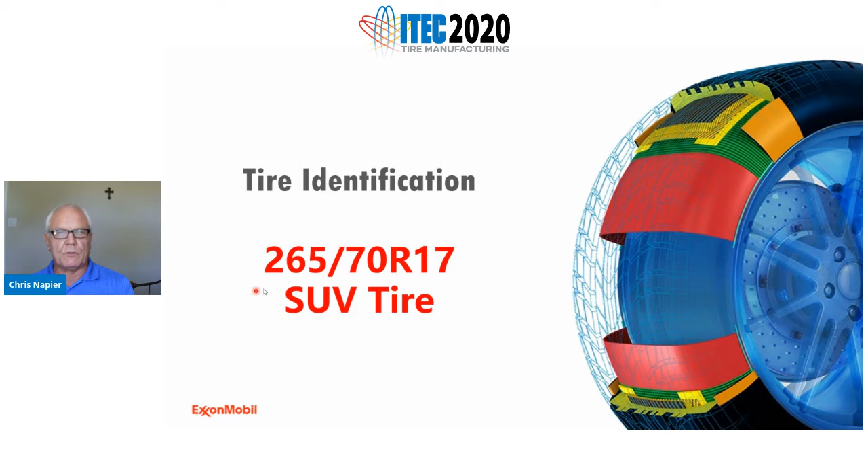So tire identification: the size of tire for this survey was a 265/70R17 SUV tire. The reason for looking at SUV tires is we look at 2015 through 2020, you can see the growing segment of the SUV market as it increased over sedans, not only in the United States but also globally around the world, and increased demand in all regions and global market share for the SUVs.

So the 265/70R17 OE tire fitments, and also that would relate to the replacement tires as well. It was the number one, number two, or number three OE or replacement tire size 2014 through 2019 for all SUV type vehicles and light pickup trucks.

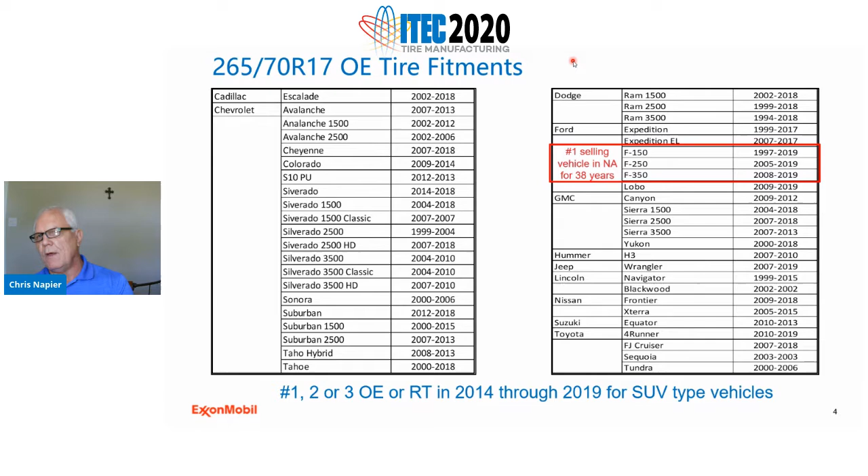And you can see here, these are just a part of the OE fitments for this particular tire size, which also includes the number one selling vehicle in North America for 38 years in a row, which is your F-Series pickup trucks by Ford. And that would also include the Lobo here, which isn't highlighted.

So the summary of tire identification for the SUV tire survey: 22 tire sets purchased in the United States. All these tires were purchased in the U.S. Tire costs range from $97 to $220 with an average cost of $150. And as I already stated, the 265/70R17 is the top OE tire or replacement tire for SUV type vehicles 2014 through 2019, and probably also for 2020, though we don't have that data yet.

Tires all purchased in the U.S. were manufactured in 9 different countries: 6 were manufactured in the U.S., 4 in Thailand, 3 in China, 2 in Mexico, 2 in South Korea, 2 in Indonesia, and 1 tire each from Chile, Russia, and Vietnam. One note of importance is that although there were Japanese tire manufacturers within the survey, none of the tires were actually manufactured in Japan.

All tires were UTQG approved as required by U.S. law. We bought 5 tires per set of the 22 different manufacturers, with the same production date within each tire set. We used tire costs correlated to region, manufacturer, and company rank, which we'll look at next. All tires had 2 polyester cords, 2 steel belts, and a nylon cap ply.

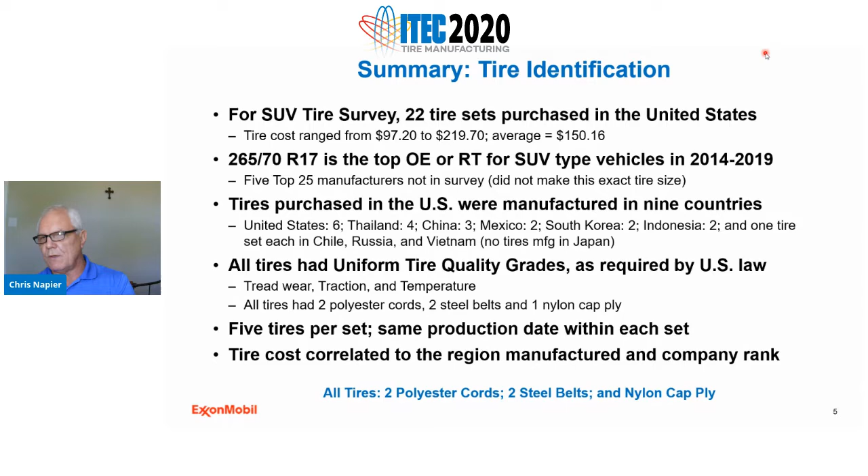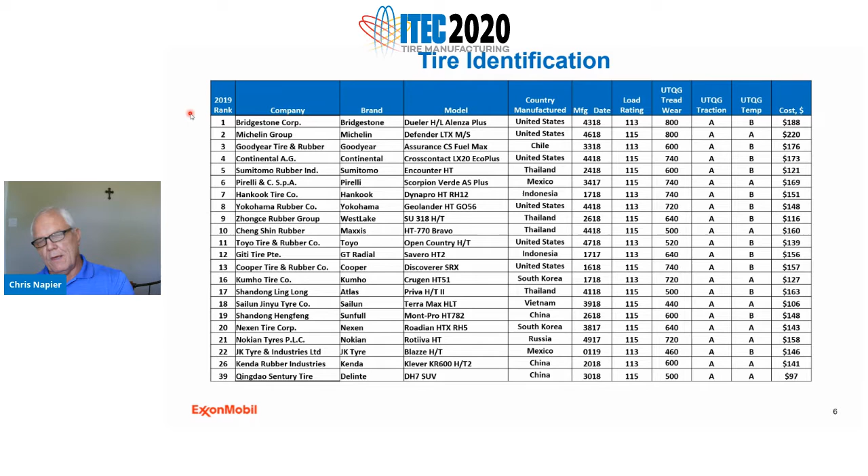So these are the 22 different tire sets. This is the 2019 published rankings, as the 2020s aren't out yet, or they will be maybe by the time this presentation is made. You can see by company rank, number 1 Bridgestone, down in this case to number 39, Sentury Tire. There were 5 missing tire companies in here: number 14 Apollo, 15 MRF, number 23 Shandong Haohua, 24 Titan, and number 25 Triangle. The missing companies were omitted because they didn't make this particular tire size, or if they did, it was not a tire size that was available within the United States.

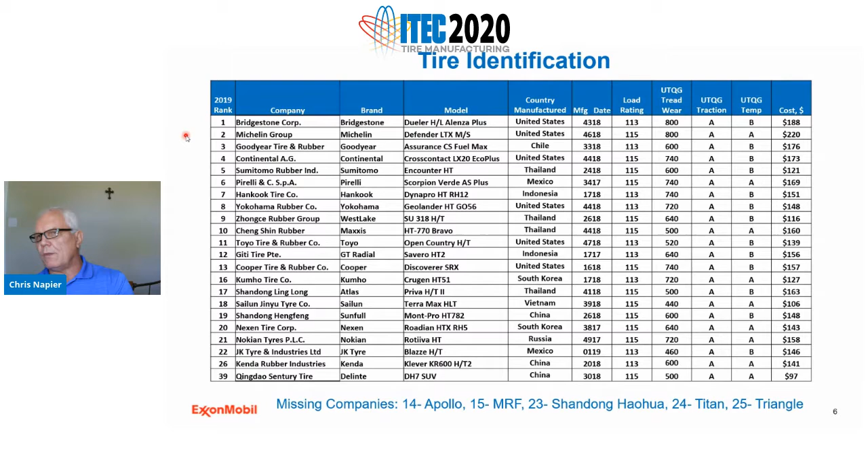So you can see here we have the company, the brand, the model of tire, the location of manufacture, the manufacturing date, UTQG, and also on the extreme right-hand column, you can see the cost per tire.

So in order to make sense of this, we divided the companies into tier groups. Tier group 1 is a well-recognized way of looking at the different companies, and has been utilized by different presentations and publications. The number 1 tier, which makes 45% of the tires in the world, are the first 4 tire companies. Tier group 2 is the next 7 tire companies, making approximately 20% of the tires globally. So that's our first 11 tires. The next 11 tire sets are what we call tier group 3, anything above the 11th tire company, accounting for about 35% of the tires manufactured globally. At the bottom, you see the tire companies that are missing because we could not obtain that particular tire size within the US.

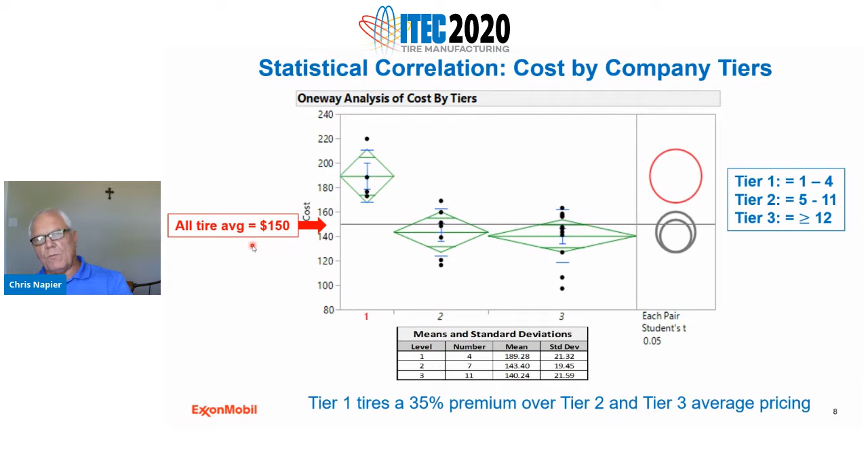As a reminder, tier 1 is companies 1 through 4, tier 2 is 5 through 11, and tier 3 is those graded 12 and greater. Tier 1 tires are 35% premium over your tier 2 and tier 3 average pricing. So there's not a lot of difference between your tier 2 and tier 3 group, but quite a premium for your tier 1 tires. The overall average for all tires is $150.

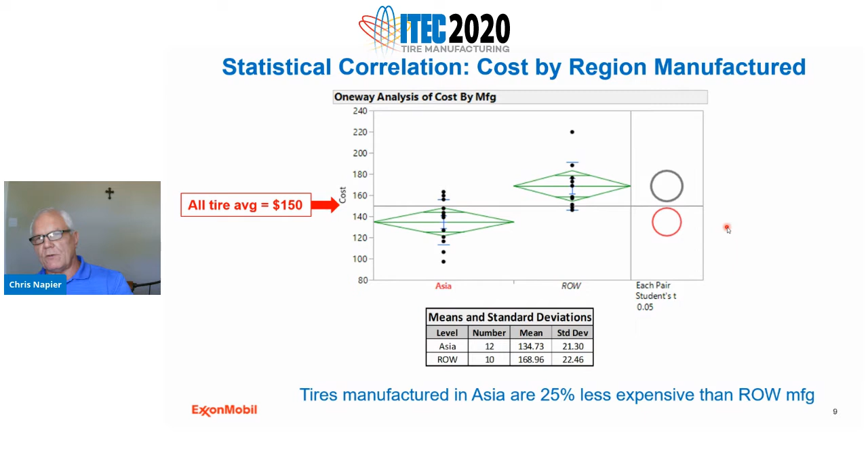Now we look at statistical correlation of cost by region manufactured. We had 12 tires manufactured in Asia, and 10 tires manufactured in the rest of the world. Tires manufactured in Asia are 25% less expensive than those manufactured in the rest of the world. Once again, the average for all tires is $150. So there's quite a statistical difference between tires manufactured in Asia and the rest of the world.

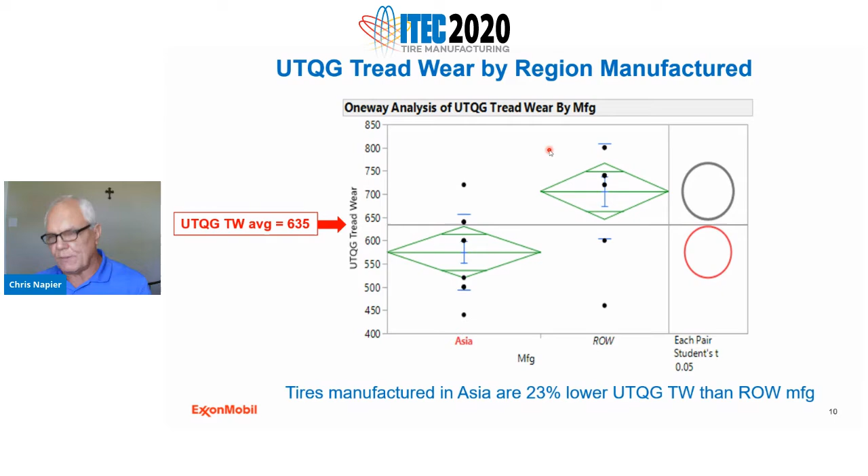So, UTQG tread wear by region manufactured: the average UTQG for all tires within the 22 tire group is 635, but tires manufactured in Asia are 23% lower UTQG than those manufactured in the rest of the world. Now, even though we looked at almost every type of correlation within this, just because we don't show it doesn't mean necessarily that it wasn't evaluated.

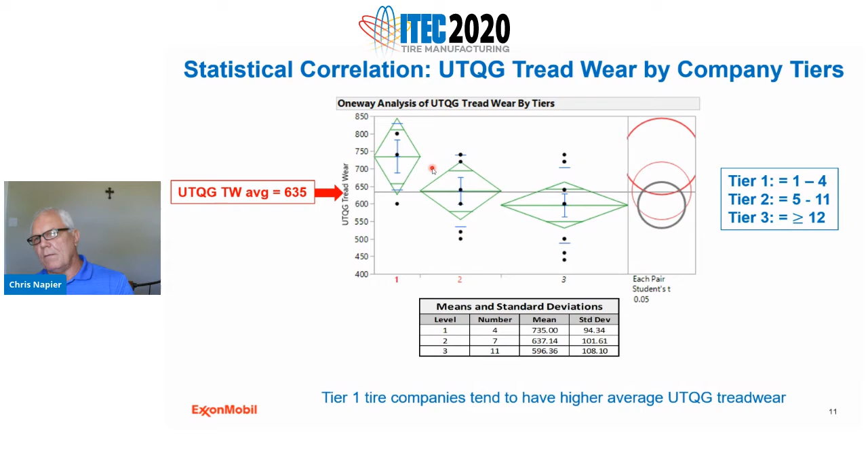So, UTQG tread wear by company tiers. The average UTQG was 635 for all tires within the group. Here you see tier 1, tier 2, and tier 3. Although it wasn't really statistically significant, you can see there's an obvious trend: tier 1 tire companies tend to have a much higher average UTQG tread wear than tier 2 and tier 3 companies, but there's a trend within all groups.

Next, let's look at tire inner liner properties. This is an example of an isotherm TGA curve that we use to do a TGA analysis for inner liner composition analysis for all tires within the survey.

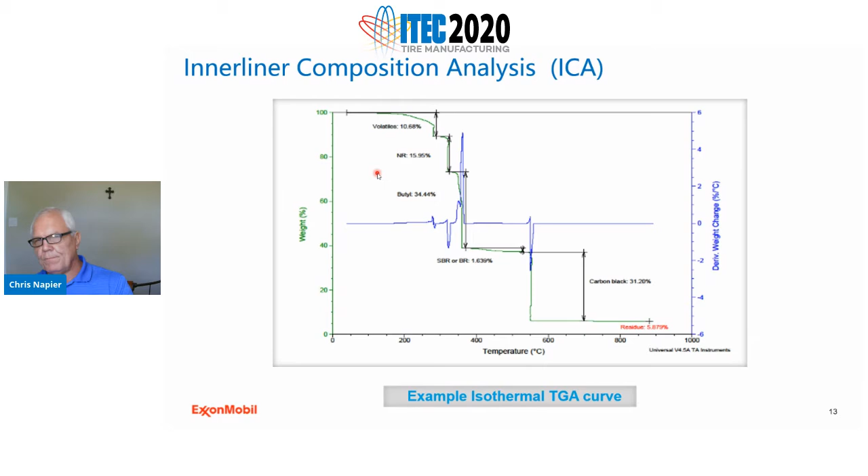In addition to doing a TGA of the composition material of the inner liner, we also did inner liner gauge analysis. This goes from toe to toe all the way around the inside of the tire. We also look at not only the inner liner gauge, but also the cushion gauge, and we establish an average gauge for both.

It's measured every 2 centimeters from the toe all the way up to the shoulder, once at the center, from the second shoulder all the way down to the toe again, giving us 25 different measurements. We record the maximum and minimum.

We determine penetration flow of the inner liner between the carcass cords and do a profile analysis. The inner liner gauge significantly impacts the inflation pressure loss rate of the tire, which we'll talk about in more detail.

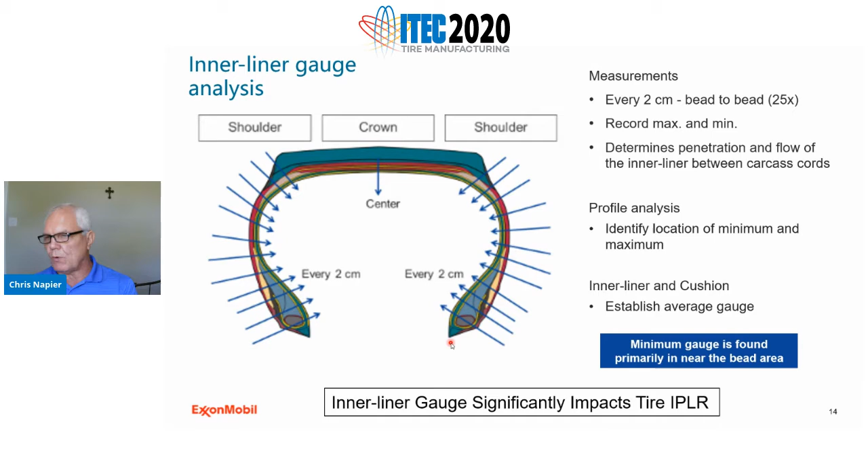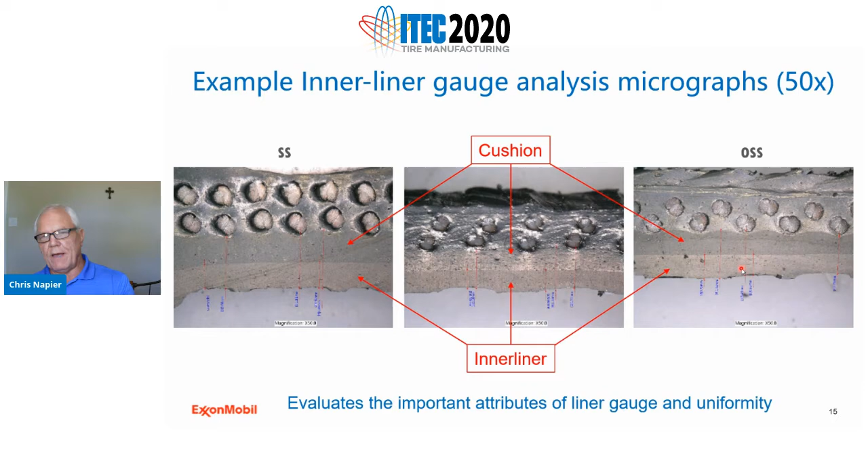Here's an example of inner liner gauge analysis micrographs, 50 magnification. This is the inner liner you can see here, and then also, in addition to the inner liner, you can see the cushion layer. This evaluates the important attributes of tire inner liner gauge and uniformity.

So the summary of our tire inner liner properties: all 22 SUV tires contain halobutyl in various amounts in the inner liner, with an average halobutyl content of 85 pHr. 5 of the tires had 100 pHr inner liner content, 3 of the tires were 90, and so on. You can see we had one tire with 62 pHr.

Natural rubber is always a secondary polymer in all the inner liner formulations. All 22 tires contained carbon black, with an average carbon black content of 66 pHr. 6 of the tires contained calcium carbonate, calculated from TGA ash at 790C. Inner liner gauge varied from 0.48 to 1.14 millimeters, with the average for all tires of 0.8 millimeter.

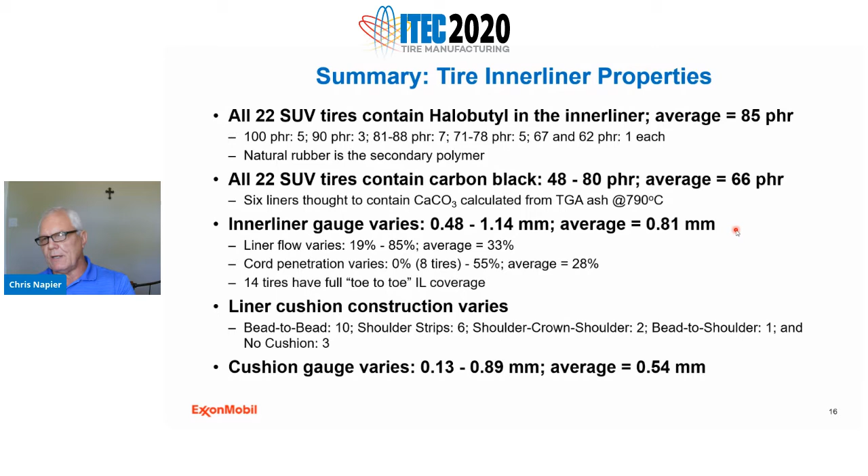14 tires had full toe-to-toe inner liner coverage, meaning 8 tires did not have full coverage all the way from toe to toe. Liner cushion construction varies very significantly: we had 10 with bead to bead, 6 with shoulder strips (shoulder crown to shoulder, bead to shoulder), and no cushion at all in 3 of the tires. The cushion gauge varied from 0.13 to 0.89 in those tires that did have a cushion, with an average gauge of 0.54.

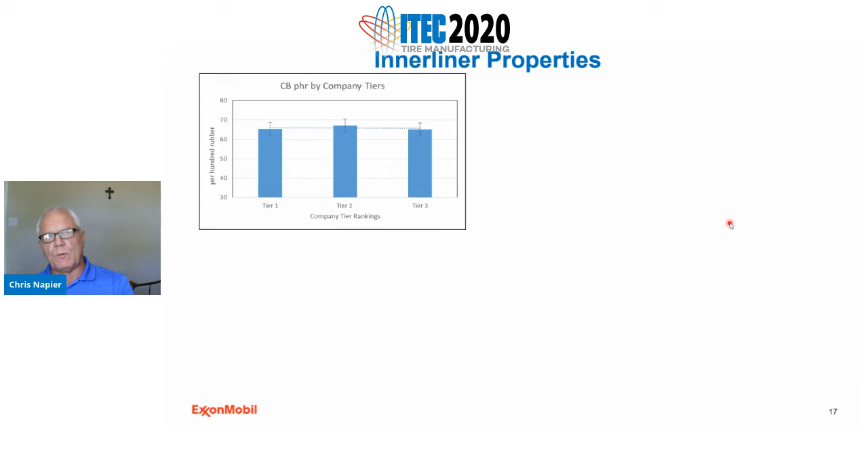So looking at inner liner properties by company tier: carbon black content showed no significant difference between tier 1, tier 2, or tier 3 companies. Inner liner gauge by company tier also wasn't very different - not a lot of difference between tier 1, 2, or 3 tire companies.

Where we did see a big difference was in halobutyl content by company tiers. Tier 1 tire companies, those 4 companies, had much higher halobutyl content than did our tier 2 and tier 3 tire companies.

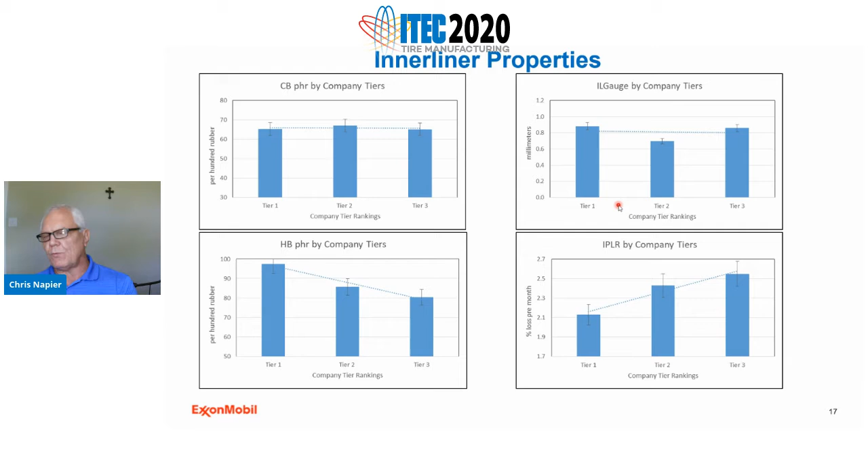And IPLR by company tiers - we'll look at inflation pressure loss rate in much more detail in the next section, but you can see that halobutyl content is directly related to the inflation pressure loss rate. Tier 1 companies had a much higher halobutyl content, which was directly related to their inflation pressure loss rate - how well the tire holds air over time.

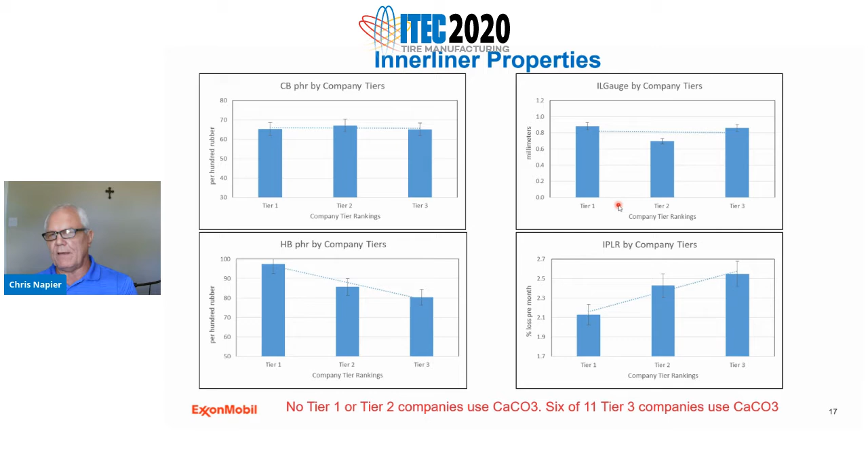No tier 1 or tier 2 tire companies used calcium carbonate. 6 of the 11 tier 3 companies did use calcium carbonate.

So we look at an analysis of variance, the inflation pressure loss rate model. What were the big factors? Halobutyl content - your halobutyl phr was the number one factor affecting your inflation pressure loss rate of tires. The next was inner liner gauge, which was of secondary importance when it came to how well the tire holds air over time.

Halobutyl rubber and inner liner gauge are statistically significant when it comes to inflation pressure loss rates.

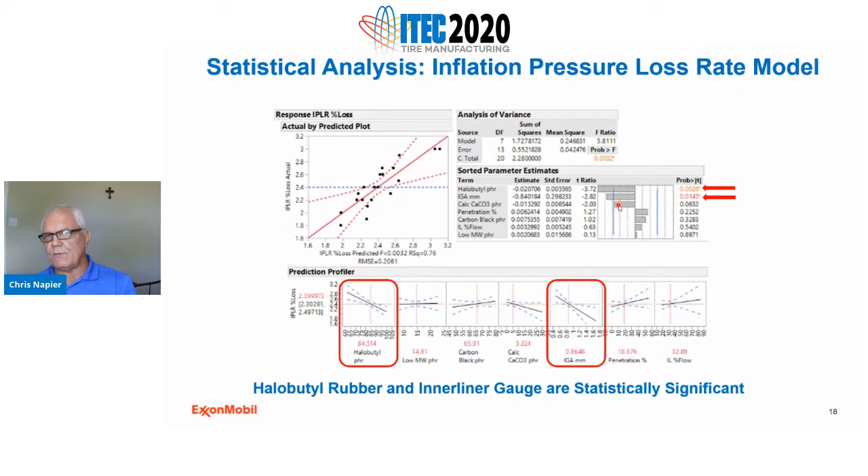In the next part, we want to look at tire weight. The weight of the 22 tires varied pretty significantly, from a low of 15.7 kilogram to 20.8 kg, with an average of 17.8. 5 tires were less than 17 kg and 2 tires were greater than 19.8.

There was no correlation to region manufactured or rest of the world when it came to tire weight. Statistical analysis shows tire weight qualitatively correlated to tread depth, and there was no correlation to presence or type of inner liner cushion. No other tire properties were measured. So the important thing was that there's statistical analysis showing weight qualitatively correlated to tread depth.

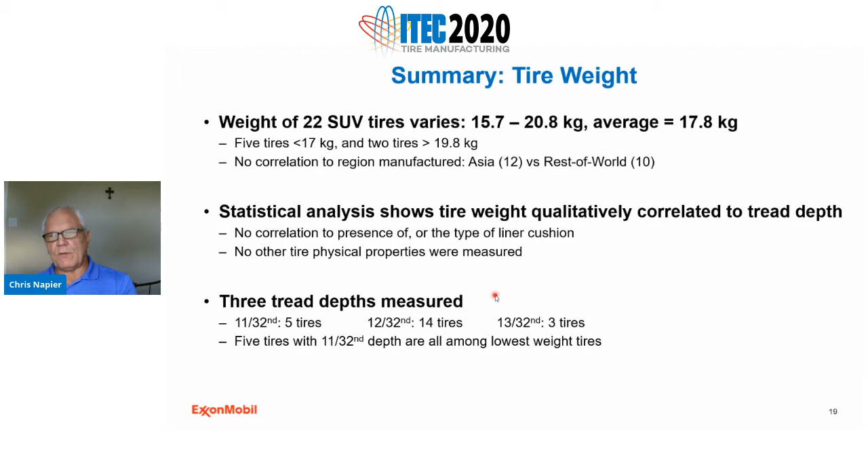Three tread depths were measured. We found 11 32nds in 5 tires, 12 32nds in 14, and 13 32nds in 3 of the tires. And 5 of the tires with the 11 32nds tread depth among the lowest weight tires, and we'll look at that. So here's tire weight, and you can see here that the heaviest tire was 20.77 kg, and the lightest tire in the group was 15.7 with an average of 17.81. Over here on the right-hand column is our tread depths in 32nds.

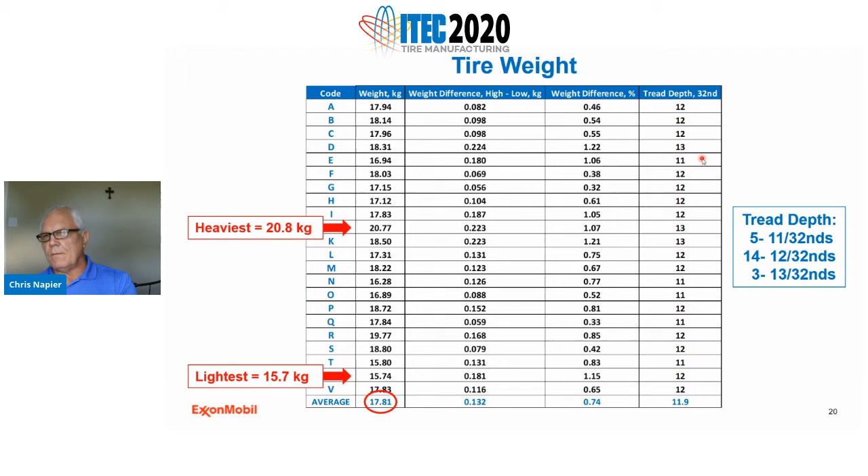Statistical analysis of weight by region manufactured. The average weight, as you see here again, is 17.8 kg. And we look at it by region manufactured, and there's just no statistical correlation, but there's a wide range. Although there is no statistical correlation between Asia or the rest of the world, there is quite a wide spread of weight differences between those tires manufactured in Asia.

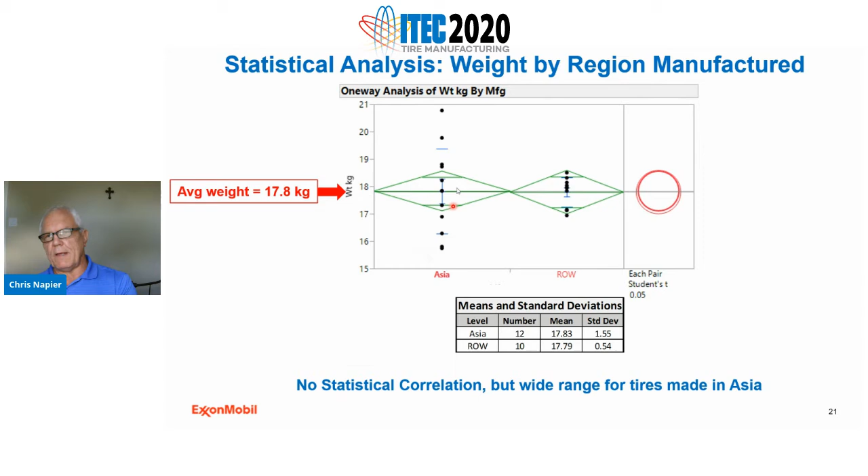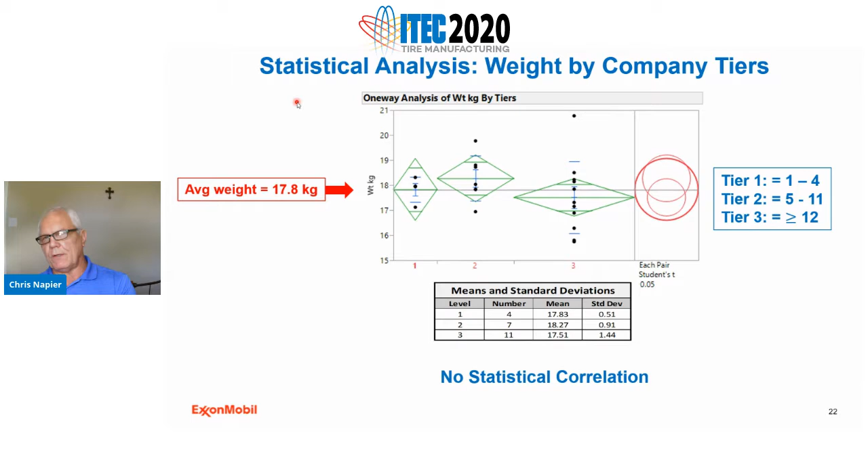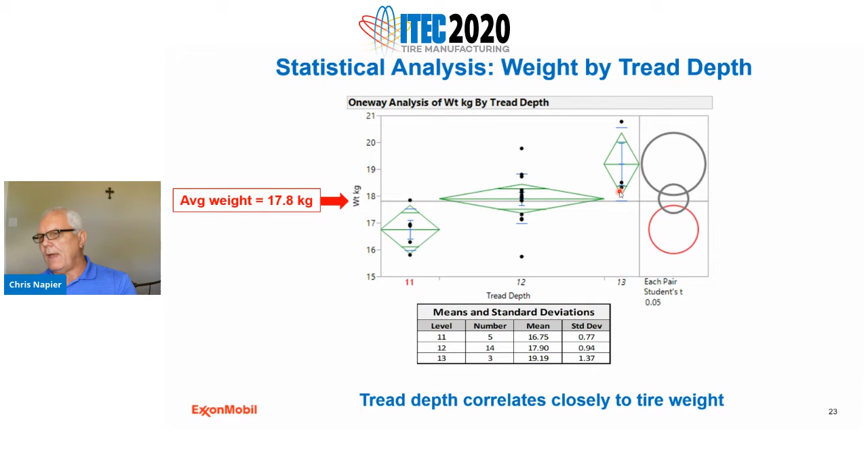So again, look at statistical analysis of weight by company tiers. Once again, no real statistical correlation, whether it be tier group 1, 2, or 3. So where is the difference in weight? Where can we find a connection between weight and any of the other properties? That was in tread depth. So you can see that although the average weight was 17.8, when we look at the tread depths of 11, 12, and 13 32nds, it was a very strongly correlated tread depth to tire weight. So tread depth closely correlates to tire weight. That's an important thing as we start to look at rolling resistance later on as well. Tire weight is very closely connected to tread depth, and tire weight and tread depth are very closely connected to rolling resistance.

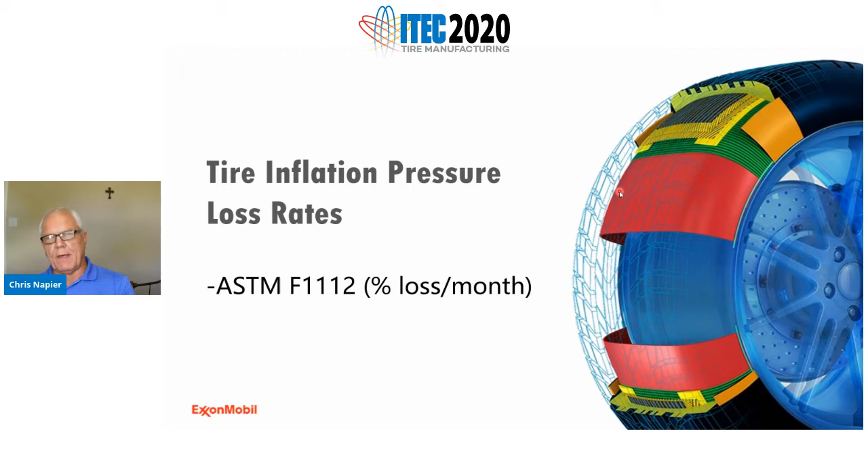So, tire inflation pressure loss rates are measured according to ASTM F1112, and expressed as a percent loss per month. Here's a summary of the ASTM F1112 overview. The tires are pressurized to 240 kPa in a 21 degree C room, which is the average room temperature. We also measure the barometric and atmospheric pressure within the room. The machine automatically records that every hour for 42 days, so we do that for 6 weeks, and then it's reported as a monthly loss rate. So what IPLR with this ASTM F1112 test does is measure the ability of a tire to retain inflation pressure over a long period of time.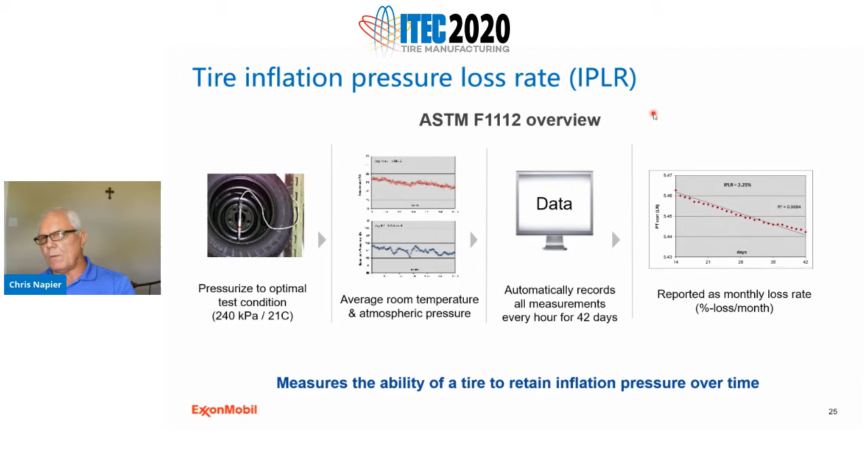It's a well-recognized test. So for tire inflation pressure loss rates, the industry standard is the ASTM F1112. IPLR is expressed as a percent loss per month, and we see that it varies quite a bit. The lowest tire within the group had a 1.8% loss rate per month. The highest tire within the group was 3%, with an average of 2.4%. We'll look at that statistically to show 4 significant variables, but only 2 decreased the inflation pressure loss rate, and that was halobutyl, as we've already seen, and innerliner gauge. Inflation pressure loss rate correlated to both region manufactured, and we'll look at that, and to the company rank.

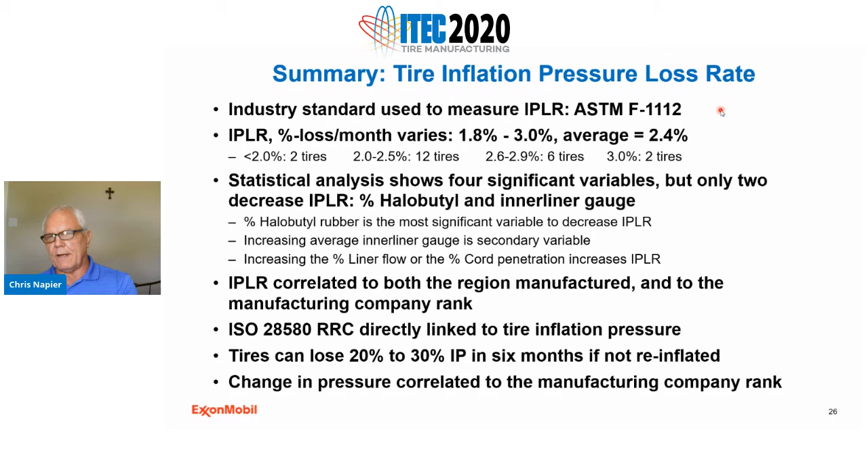And then we'll look at the ISO 28580 rolling resistance test, and we'll see that it's directly linked to tire inflation pressure. Tires can lose 20 to 30% of their inflation pressure over 6 months if not reinflated during that time. Change in pressure correlated to the manufacturing company rank.

So this is our tire pressure here. You can see that the lowest inflation pressure loss rate was 1.8, 1.9%. We had 2 tires that were under 2%, and 2 tires that were at 3%, with the average inflation pressure loss rate for all tires within the study being 2.4%. Here we see the average pressure decrease.

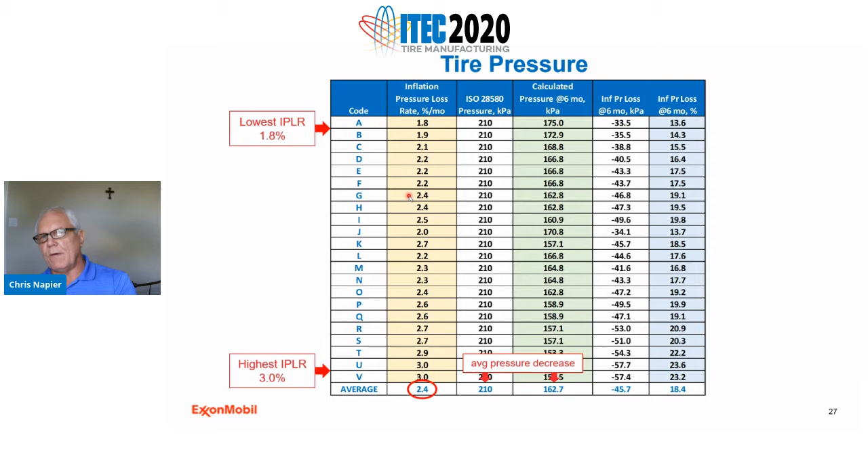So in the rolling resistance test, the ISO 28580 test, the initial rolling resistance inflation pressure is 210 kPa. If we do a calculated inflation pressure at 6 months, asking what the inflation pressure would be 6 months later if not inflated, you see that the average pressure decreases from 210 to 162 kPa. Here, in this green column, you can see the calculated inflation pressure based on the inflation pressure loss rate as measured by ASTM F1112 after 6 months, if all tires started at 210 kPa. So decreased pressure has a negative impact on wear, fuel efficiency, and safety.

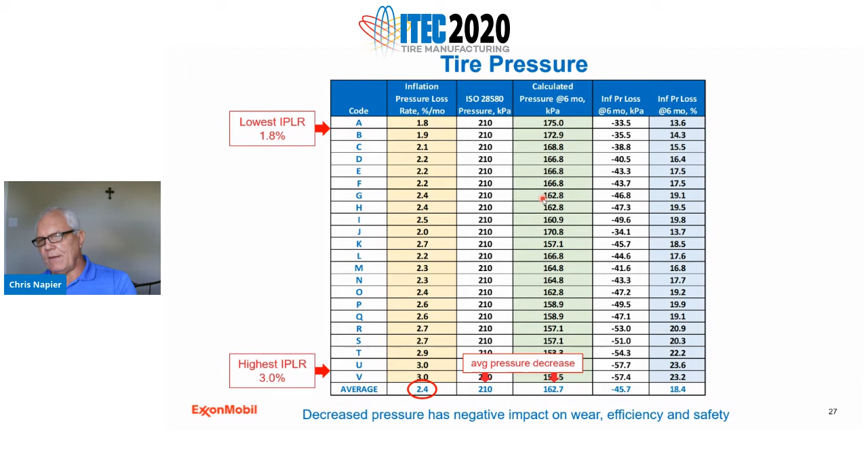So we look at the inflation pressure loss rate of the tires by company tiers, tested per ASTM F1112 at 21 degrees C. You can see the tier one tire companies here, those top four, the next 7 tire companies, and the other 11 tire companies within the survey.

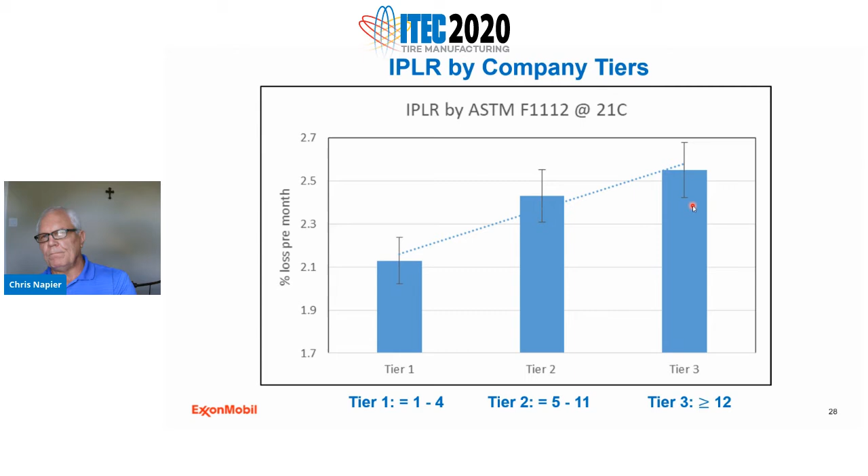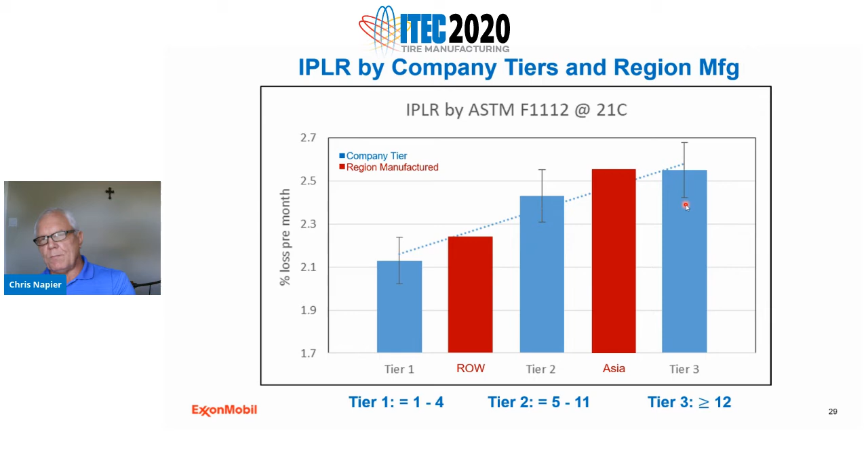Now we're going to look at it by region manufactured, as we had previously done. But what about if we look at the region of manufacture in addition to the company tiers? You can see here that tires manufactured in Asia have a much higher inflation pressure loss rate than the rest of the world.

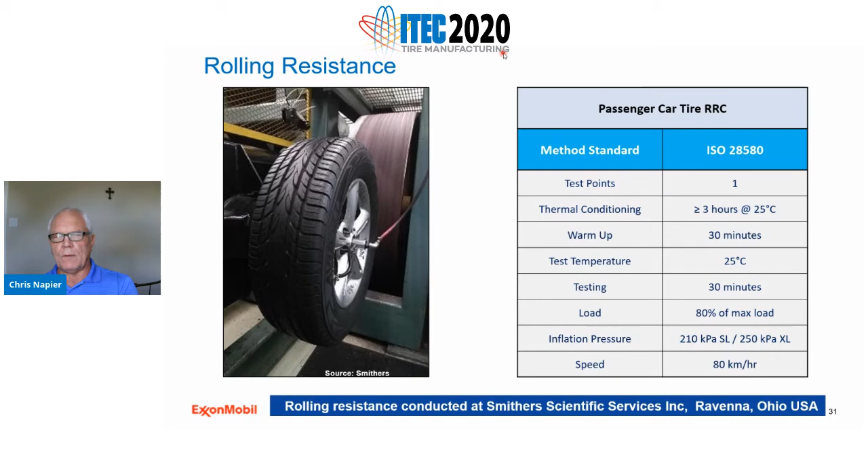Next is to look at tire rolling resistance by the ISO 28580 test method. This is the summary of the rolling resistance test: thermal conditioning, 30 minute warm up, test temperature 25 degrees C, testing for 30 minutes, 80% of load, starting at 210 kPa, and speed at 80 kilometers per hour. All these tires were tested at Smithers Scientific in Ravenna, Ohio.

For rolling resistance coefficient, the industry standard ISO test was used, as I stated. We found it varied quite a bit, from a low of 8.7 kg per ton to 10.6, with an average of 9.2 for all tires. Although the United States has no government standard for fuel efficiency, we looked at European regulations for RRC for comparison purposes. There were 10 Class C tires, 10 Class E, and 2 that were actually Class F.

Looking at rolling resistance after 6 months, as we looked at earlier, I was able to show what the inflation pressure would be after 6 months of standard use if tires were not reinflated. We retested those tires at the 6-month inflation pressure to determine the rolling resistance if it had not been reinflated, based on the inflation pressure loss rate. The RRC increase due to pressure loss can be correlated to the region of manufacturing and company tire rank.

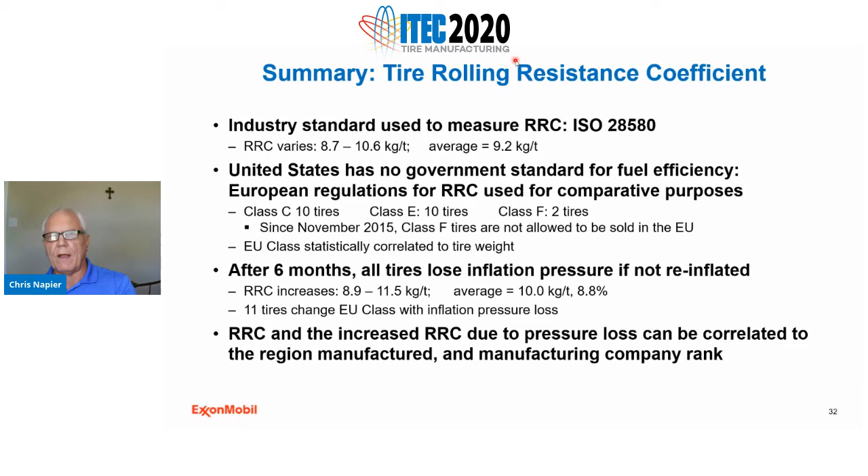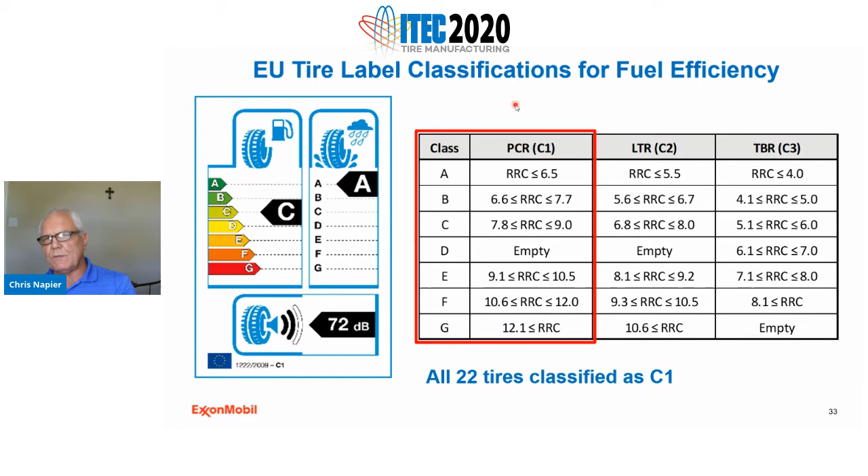This is the EU tire label, as you've all seen before. All 22 tires within the study were classified as C1 tires. The class here shows the different buckets, so we had C1 for all tires, and we'll also look at the class, whether it be A through F.

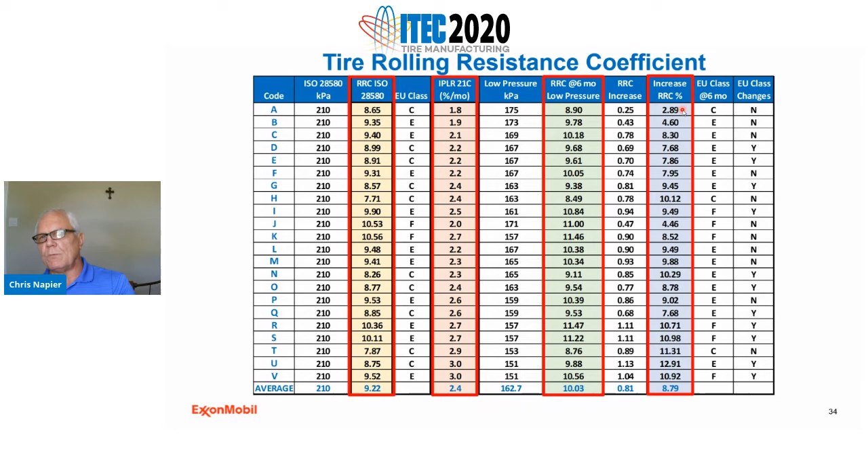But it certainly was much more for some tires. You can see some tires with much lower inflation pressure loss rates, around 1.8, 1.9, only went to less than a 3% change in rolling resistance from its initial value at 210 kPa to its low inflation pressure after 6 months of pressure loss.

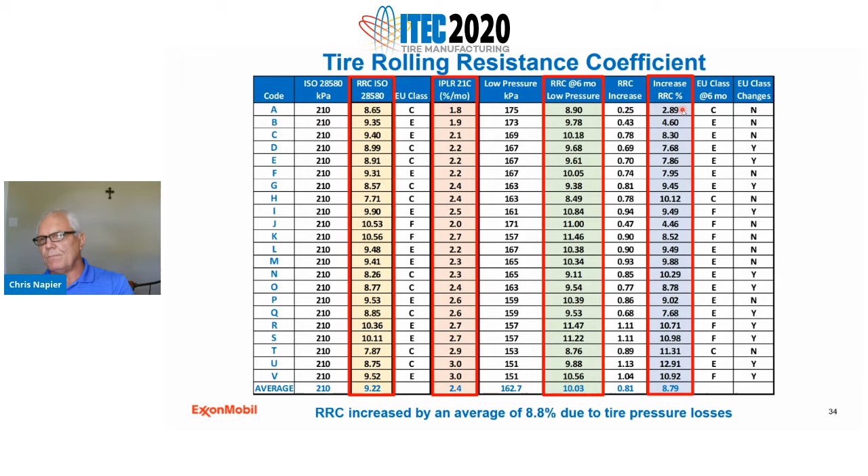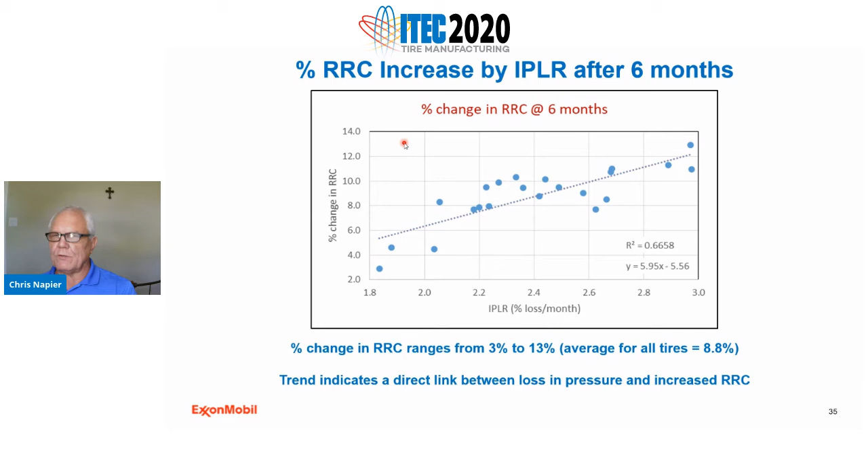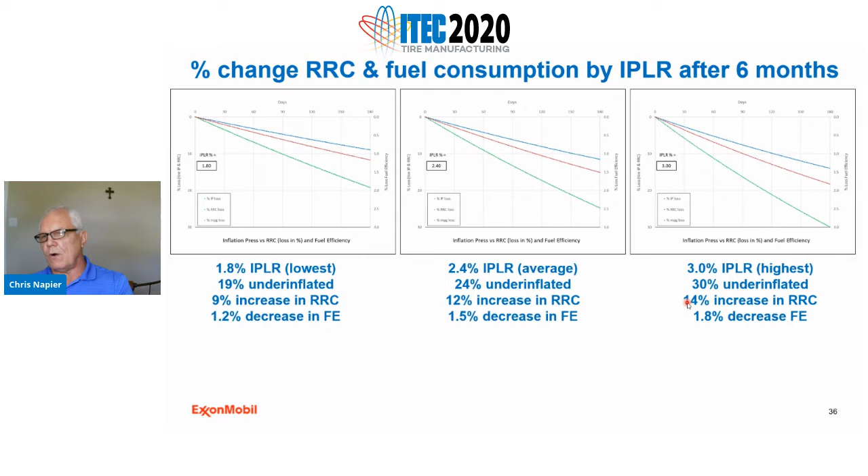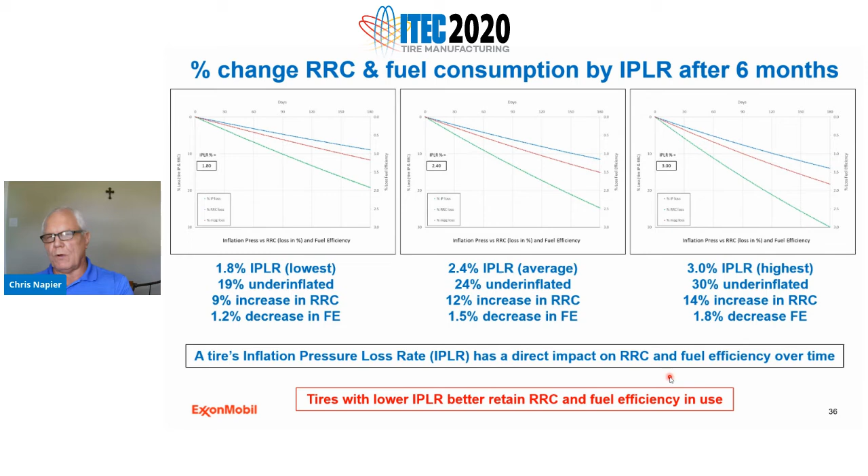If we look at the highest tires within the group, you can see that the 3% inflation pressure loss rate, your highest, is now 30% underinflated, with a 14% increase in RRC and a 1.8% decrease in fuel efficiency. So a tire's inflation pressure loss rate has a direct impact on RRC and fuel efficiency over time. Tires with lower inflation pressure loss rates retain their rolling resistance coefficient and fuel efficiency better in use.

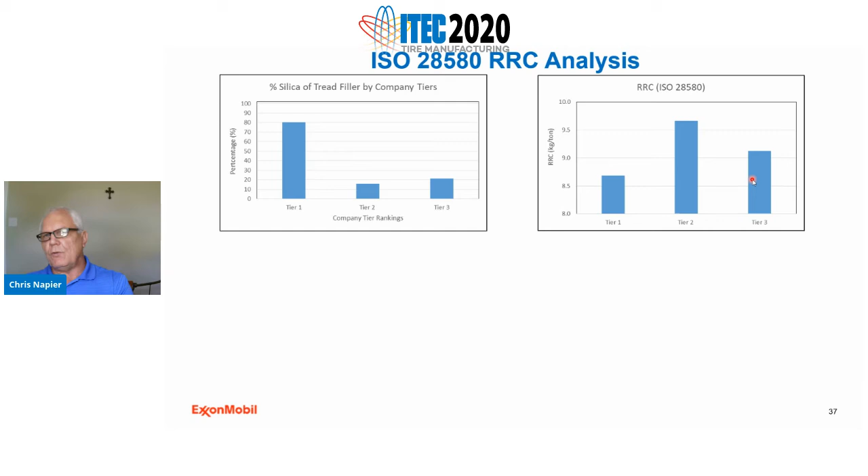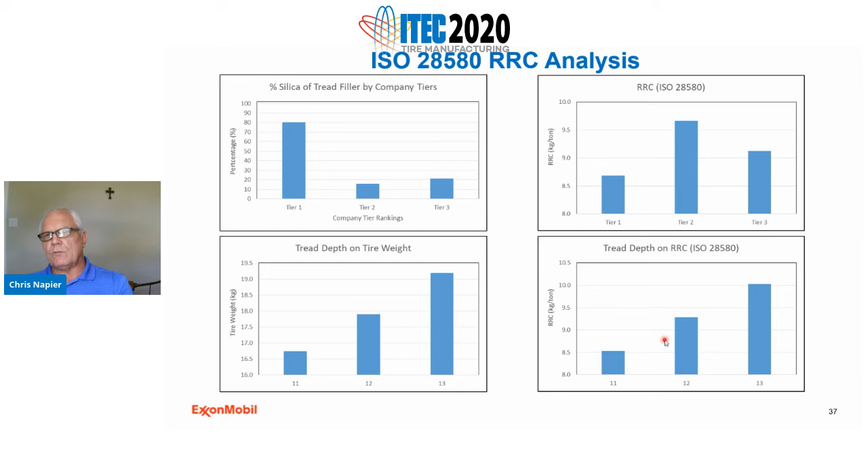So if we look at tread depth and tire weight, we know that the 11 32nds, 12 32nds, and 13 32nds had a very strong relationship to tire weight. And if we look at tire weight and tread depth as it relates to rolling resistance, you can see that rolling resistance, tread depth, and tire weight are also very closely related. But there was no relationship between tier 1, tier 2, and tier 3 companies as it relates to weight, so that's why it's a bit masked here as far as silica goes.

So if we look at an analysis of variance, tire weight and percent silica tread filler have the greatest effect on RRC.

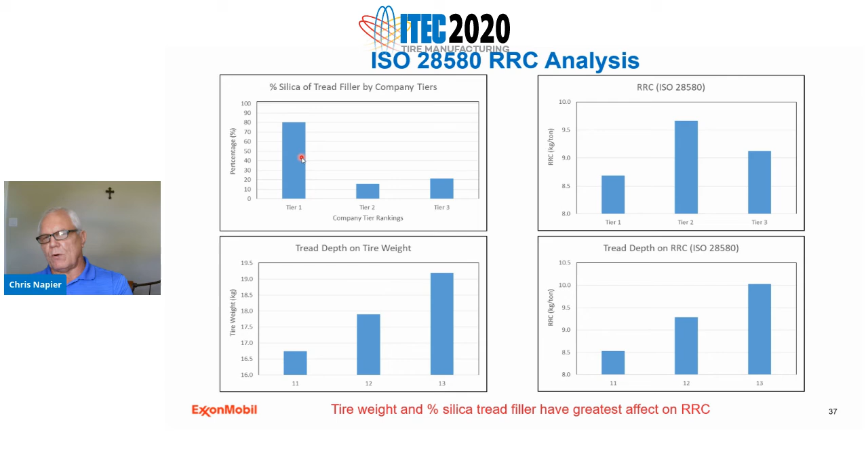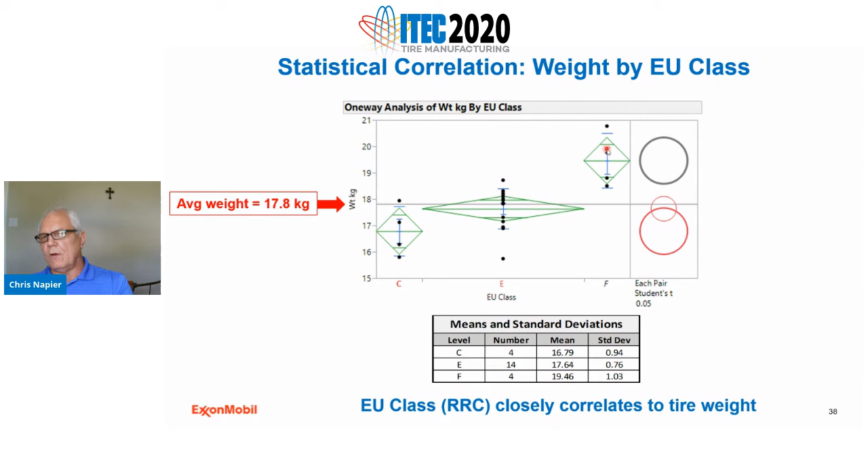So statistical correlation of weight by EU class. If you think back to the EU label, and we look at groups C, E, and F according to the European label, we can see weight is very closely related to the class here. The average weight, once again, is 17.8 kg, and you can see that as weight increases, so does your rolling resistance. There's a big difference between your tire weight between your C and F class as it relates. So EU class RRC is closely related to tire weight.

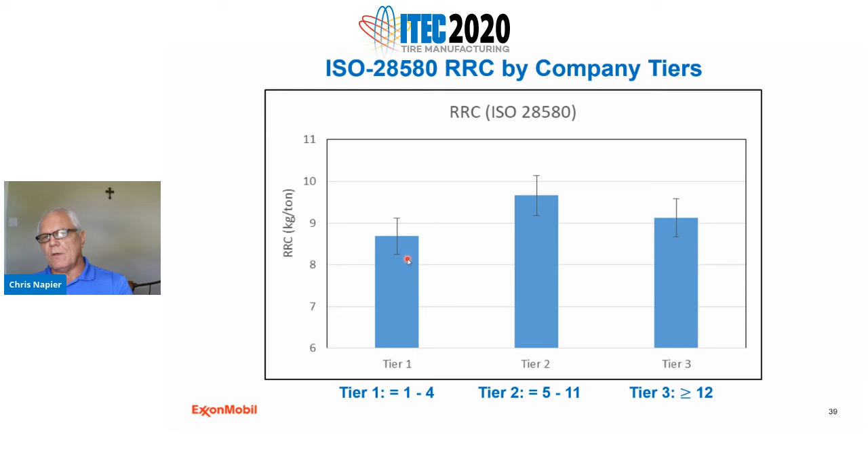So once again, we look at RRC by company tiers, and we didn't seem to find a strong relationship there — somewhat, because we remember that the tier 1 companies had the highest amount of silica within the tread formulations. But where do we find the strongest relationship?

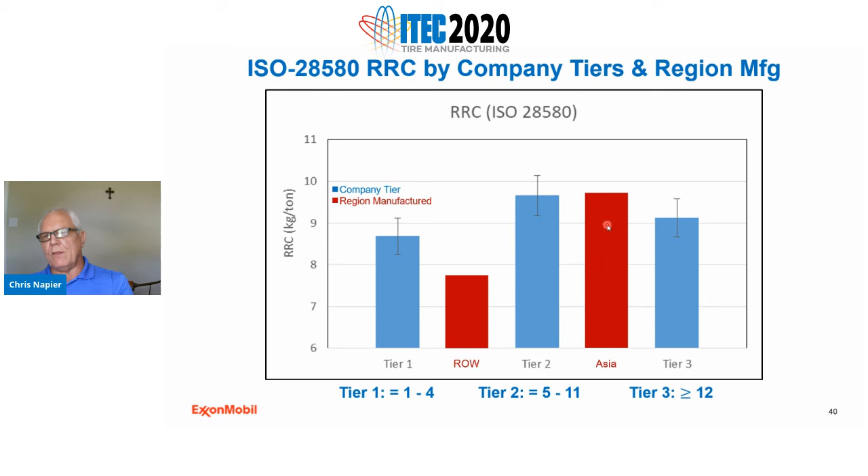We look at it by region of manufacture. If we look at tires manufactured in Asia and their average rolling resistance, versus those manufactured in the rest of the world, we can see there's a very strong relationship: tires manufactured in Asia have a 25% greater rolling resistance than those manufactured in the rest of the world.

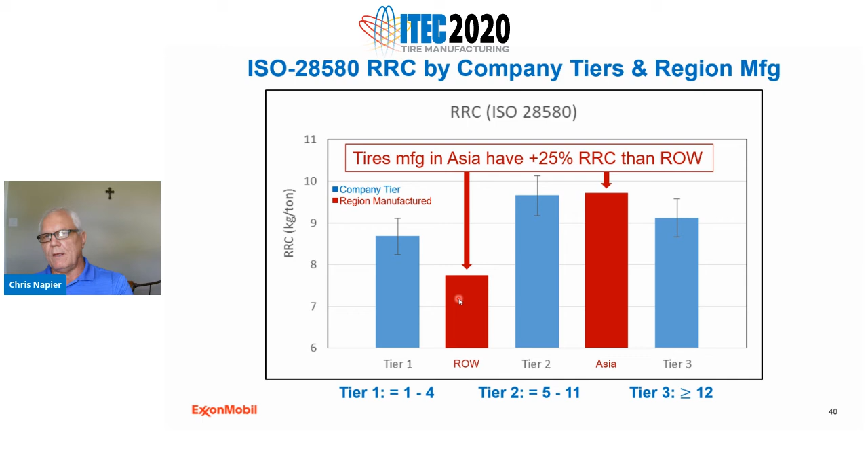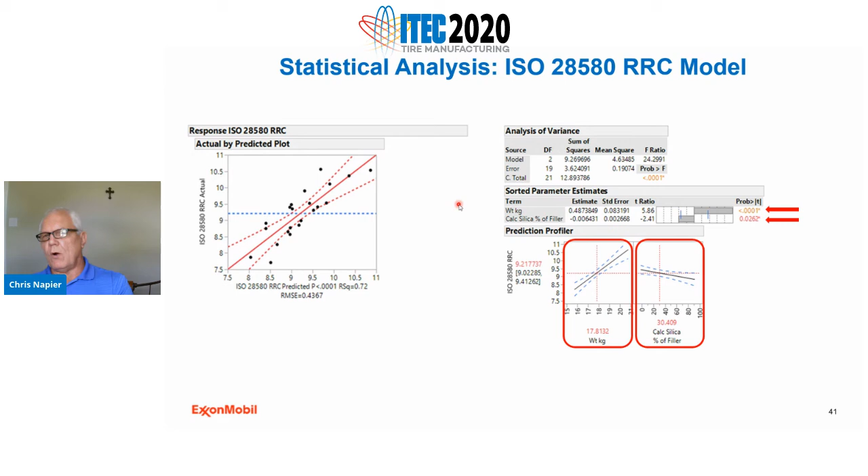So we do an analysis of variance here, using the ISO 28580 rolling resistance model, and you can see that tire weight and silica filler in the tread compound have the strongest relationship to the rolling resistance model.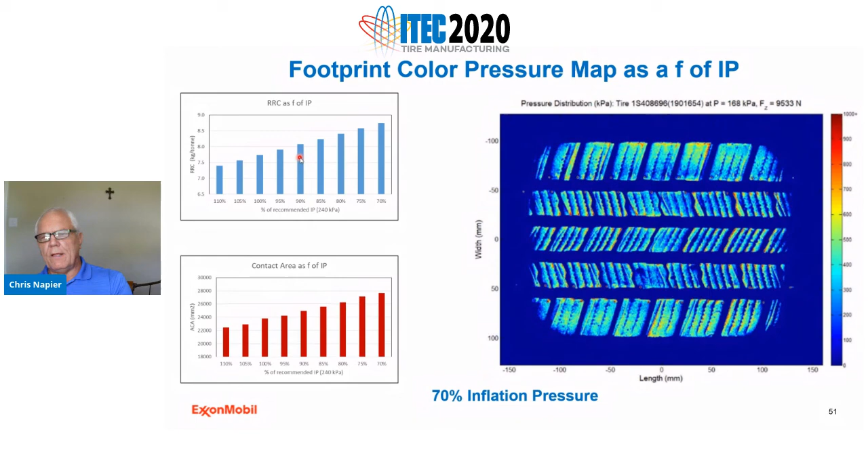So in the contact footprint pressure map on the left side, you can see where we started out with a rolling resistance coefficient of 7.4, relative to your actual contact area here.

If we look at it at 70% of inflation pressure, you can see the rolling resistance coefficient increased by 18.25% as we decreased pressure over time, and your actual contact area increased by 23.25%.

But in addition to the increase of contact area and rolling resistance coefficient, you can see this is a good pressure distribution here on the tire that's fully inflated.

But if we look at the change in pressure distribution, where the pressure had been pretty well distributed around the entire footprint, here we can see that almost all the pressure now shifts from the center, giving us very poor wet traction, without good wet contact in the middle crown area.

What we see is most of that pressure is now shifted out into the shoulder area, which is going to give us poor traction and also poor tread wear.

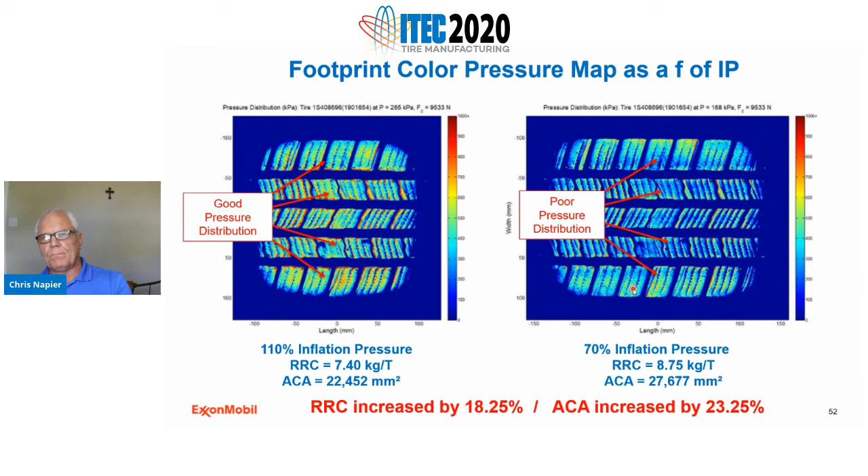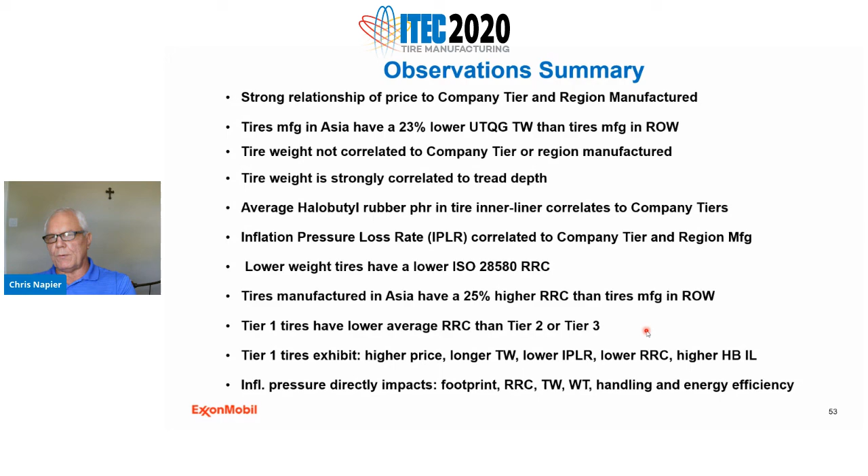Inflation pressure directly impacts footprint, rolling resistance, tread wear, wet traction, handling, and energy efficiency. For your attention, I thank you very much.